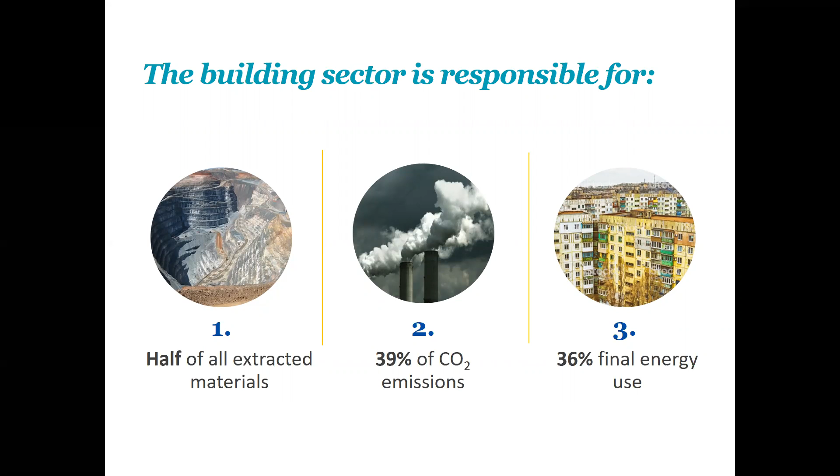The building sector, as I mentioned, is responsible for about half of all materials extracted, as well as about 39% of carbon dioxide emissions and around 36% of final energy use. So the impact from the building sector is immense. This also gives us an opportunity to do something, because if we focus on this sector and try to enhance its sustainability, this could have a very, very big overall effect.

We're interested in using wood as a building material because it can contribute to climate change mitigation and other sustainability goals. Wood is a good material in terms of energy efficiency and can help lead to more energy efficient buildings. It also has some good health benefits, such as helping to reduce the fluctuations in relative humidity inside buildings, which can lead to a more favorable and healthy internal climate for people.

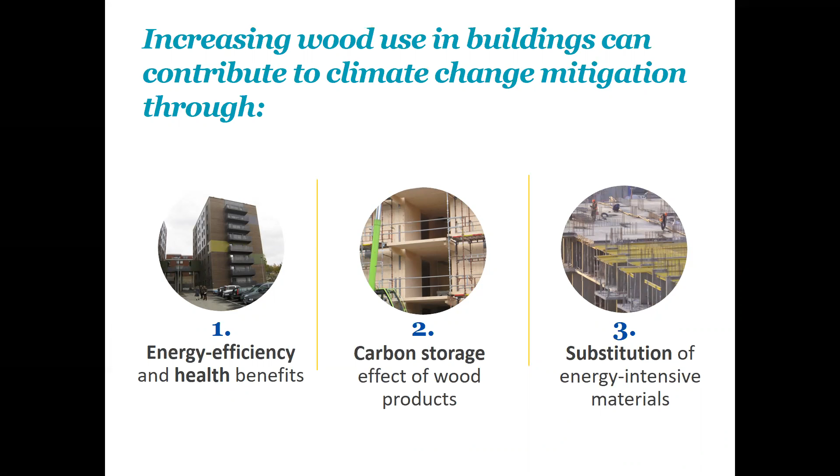About 50% of wood is composed of carbon. So for every ton of wood utilized, around 1 2/3 of a ton of carbon dioxide is stored within that wood material. In addition to the carbon storage capacity, when we're using wood, we are not using other materials which are often more energy intensive, materials such as concrete and steel. So we get an additional substitution improvement in terms of climate change mitigation potential by substituting for energy intensive materials.

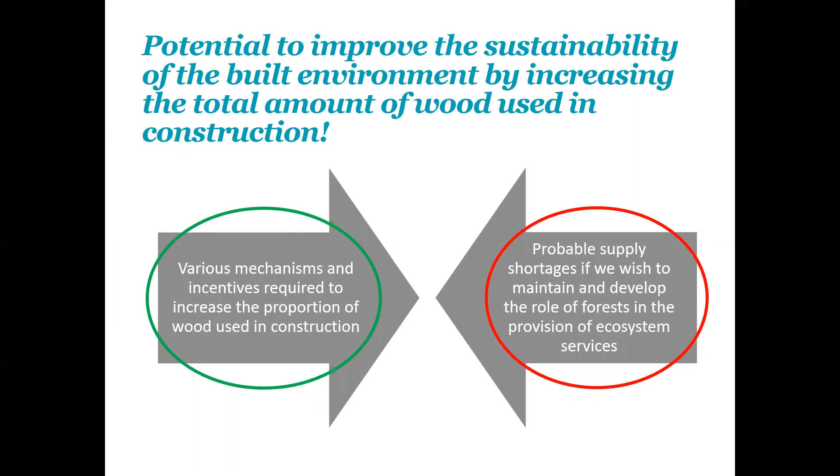There's good potential to improve the sustainability of the built environment by increasing the total amounts of wood used in construction. And on the one side, we certainly need various mechanisms and incentives to increase the proportion of wood being used in construction. However, as we move forward, we may well be faced with supply shortages if we wish to maintain and develop the role of forests in the provision of ecosystem services, as well as providing wood materials for the growing bioeconomy. So we may have a situation where we need to improve the resource efficiency of use of wood. And this forms the background to this particular work package.

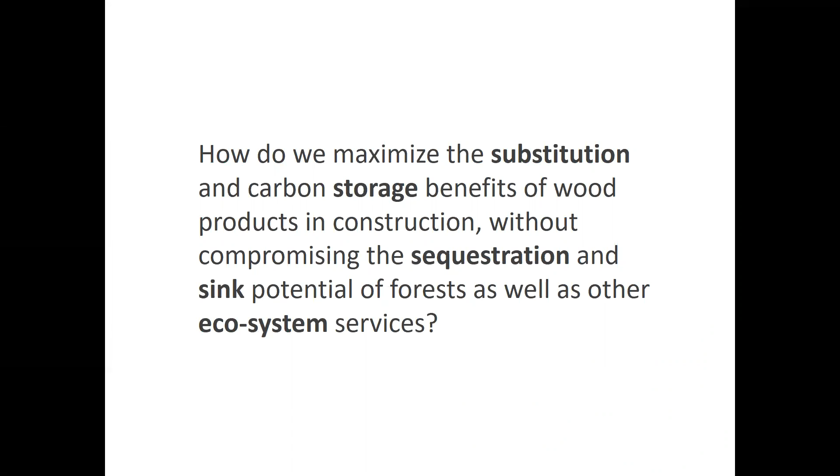So the overriding question is, how do we maximize the substitution and carbon storage benefits of wood products in construction without compromising the sequestration and sink potential of forests, as well as other ecosystem services?

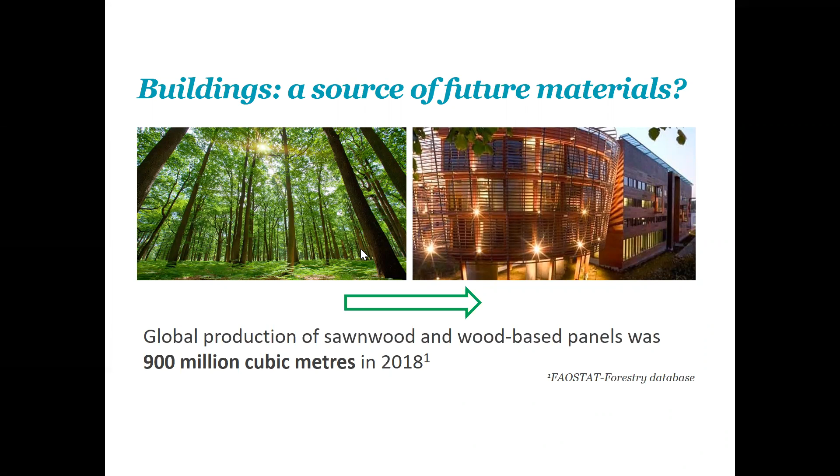Something of the order of 900 million cubic meters of sawnwood and wood-based panels were produced in 2018. And whilst not all of these, of course, go into construction, a large proportion do. So in effect, the carbon storage potential of the forest is transferred to the built environment, to buildings. And as buildings are constructed, the store of carbon in the buildings can increase, and this can be a source of future materials. The wood within the buildings can be a source of future materials if we learn to use this material more effectively.

How much of this wood is available? Well, there have been some recent studies. For example, it's been estimated that approximately 32 million cubic meters of wood is bound up in residential buildings in Austria. And this is forecast to rise to over 50 million cubic meters by the year 2100. This study was part of an earlier Wood Wisdom Net project called Carewood.

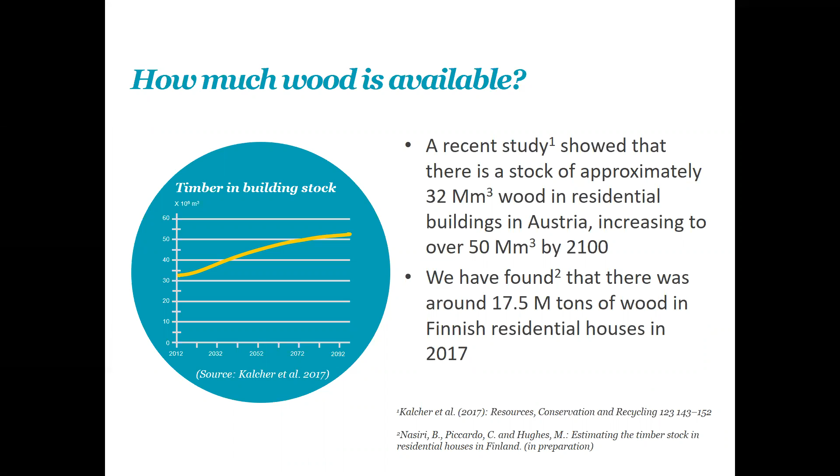In recent work we've been conducting, we've estimated that there's around 17.5 million tons of wood in Finnish residential houses, at least there was in 2017. So we clearly know how much wood is available, and we can use various statistical approaches to calculate the amount of wood.

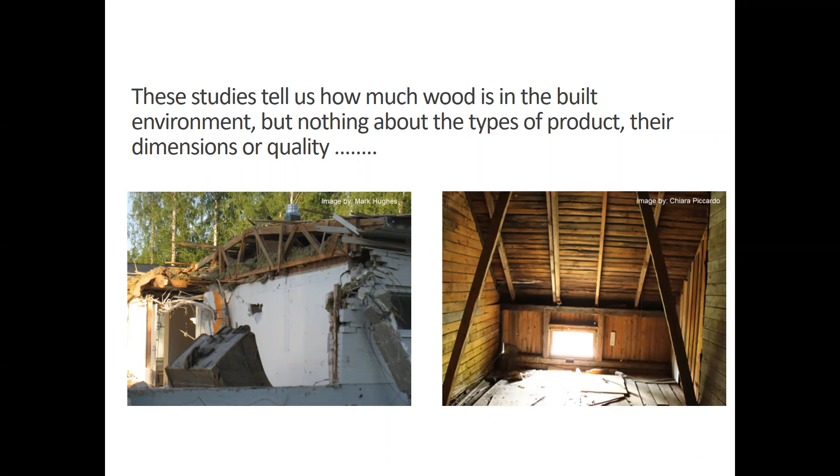So these studies tell us how much wood is in the built environment, but do not really tell us about the type of wood products or their dimensions or their quality. And as you can see in the two images below, on the left-hand side, it's a traditional bricks and mortar construction, but there is wood in the roof structure that could be recovered and reutilized. On the right-hand side, an image of a wooden building where, of course, there's much more wood available. But again, we don't know the dimensions of the wood that's been used, nor the quality of the wood that is in there. And this is something we really need to understand better in order to reuse it in the future.

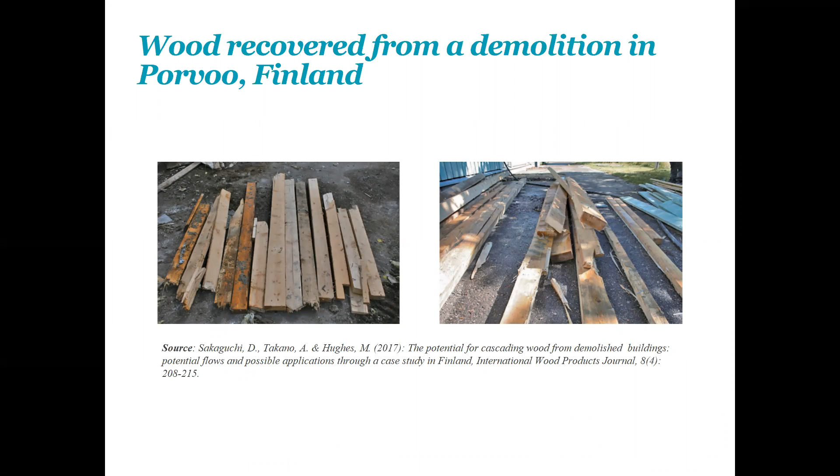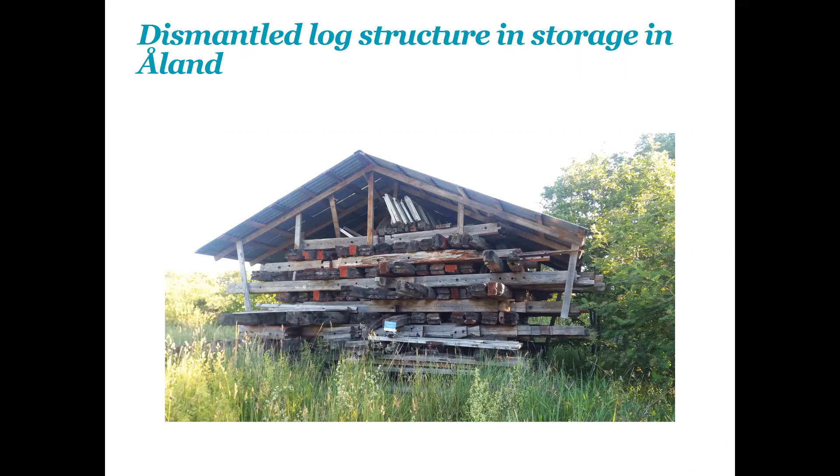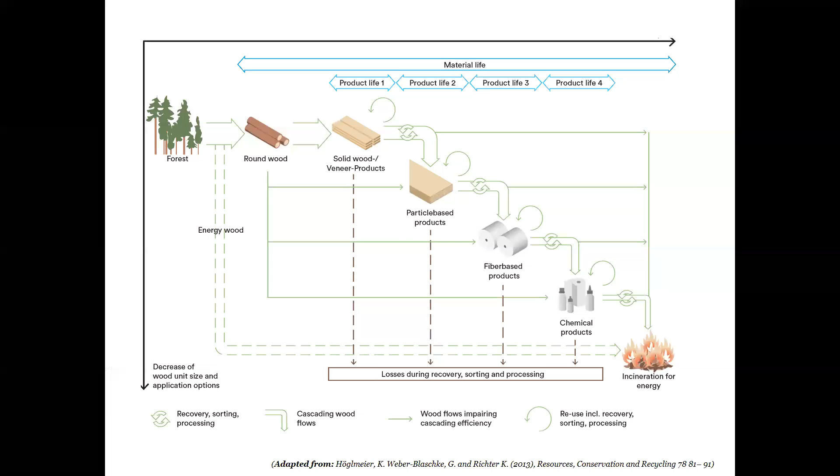For this reason, most of the wood that comes from deconstruction or demolition currently goes straight to energy recovery. So the wood is chipped and it's burned. What we would like to see, and this is the main aim of our project in Future Wood, is to retain the value or the quality of wood for a much longer period of time by reusing it or recycling it in a high value scenario before eventually recovering the energy content, perhaps with further intermediate steps in the cascade chain.

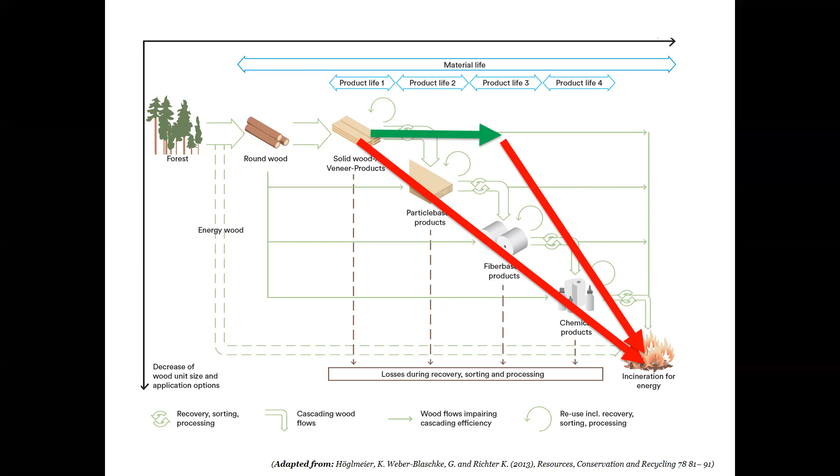However, current demolition practices are not really compatible with material recovery for cascading. So this really limits the cascading options. As we've just seen, wood that comes from buildings demolished in the current way tends to be chipped and used for energy production. So we really should think about building buildings with the ultimate disassembly in mind. So we should have buildings designed for disassembly and the recovery of elements and materials at the back of our mind always.

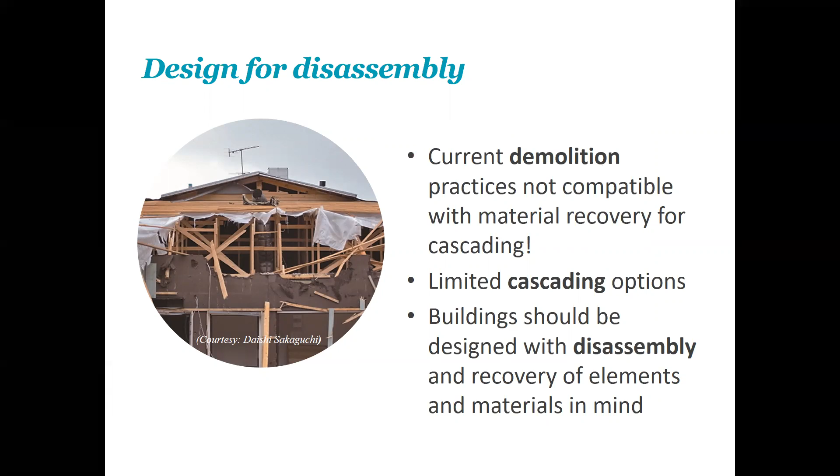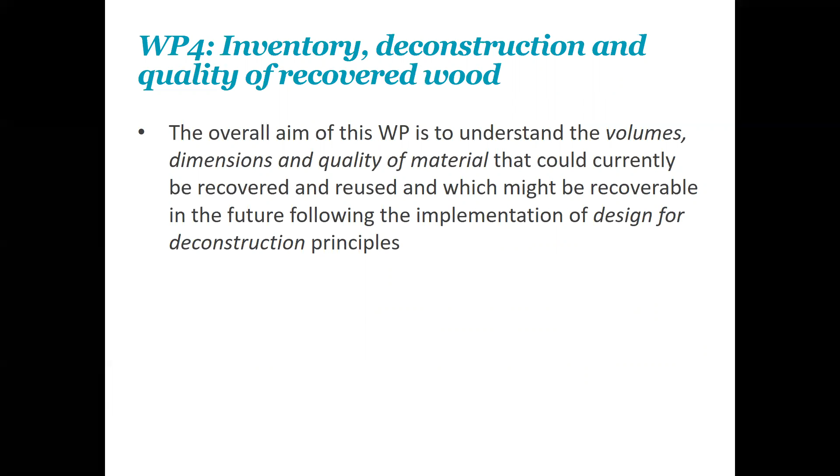So the aim of this particular work package is really to look at the stock of material that's currently within the existing building stock, and to understand how this relates to the wood that would actually come out of buildings. So the overall aim is to understand the volumes, dimensions, and the quality of material that could be recovered and reused, and which might be recoverable in the future if we were to implement design for deconstruction principles.

So we have a number of research questions in our work package. Firstly, we would like to know what the total volume of wood is in the built environment and what it's composed of: the types of products, their dimensions and their function. And how does this vary from one type of building to another? So that's one of our research questions.

We also would like to know how buildings are currently demolished, and are there any actions that can be taken to increase the recovery of high quality timber suitable for reuse or other high value applications. So it may be that there are small changes that could be made that would help us recover a far greater proportion of high value material.

We also want to be able to measure the quality of recovered wood, and what criteria do we need to apply to this assessment, both within the research work we're doing, but also then in practice when we are trying to measure the quality of wood that comes from demolished or deconstructed buildings.

And finally, we need some kind of predictive model to estimate how much timber and in what form, so particularly its dimensions and its quality, is currently available and what will become available in the future, and how this might be affected if we were to adopt design for disassembly processes.

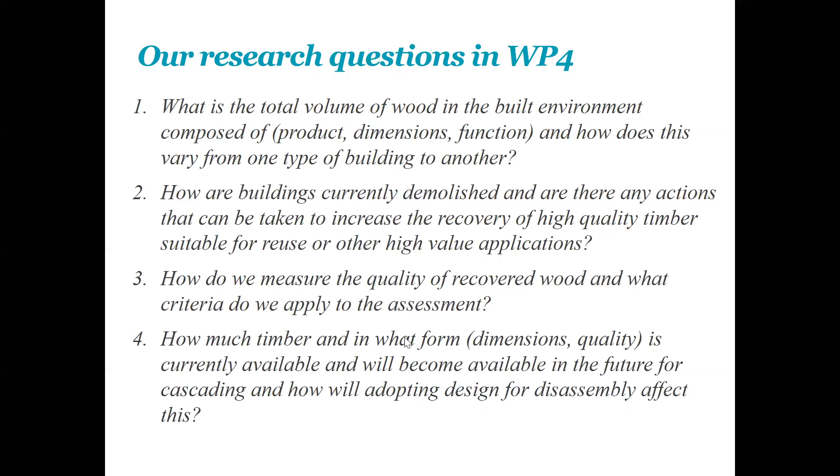So these research questions translate into our 4 tasks within this work package, which are firstly to create an inventory of wood used in construction, and this is not just at the level of volumes, but also incorporating dimensions and product types. So we need to know all about what's actually in buildings. Current demolition practices, so we are exploring the current demolition practices and how these might be modified to recover more material.

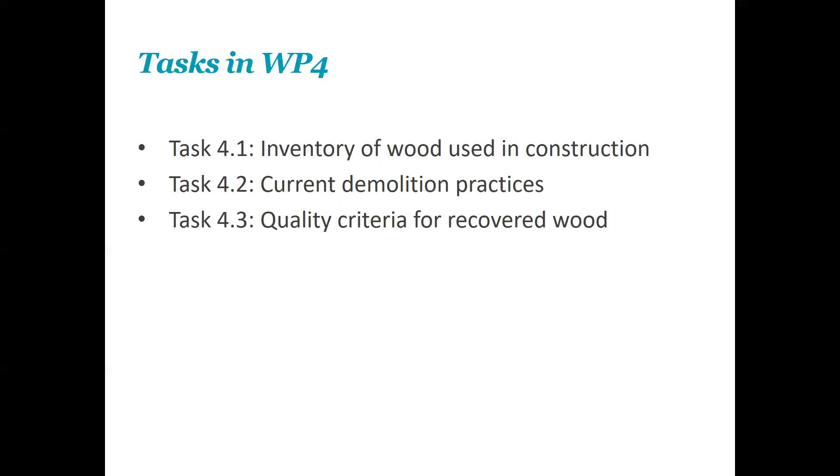In the 3rd task, we are creating a set of quality criteria for recovered wood so that we can measure the quality against certain set criteria that are relevant to the reuse and the recycling of the material. And finally, we want to create a model that enables us to predict the volumes and the quality of recoverable wood in the future.

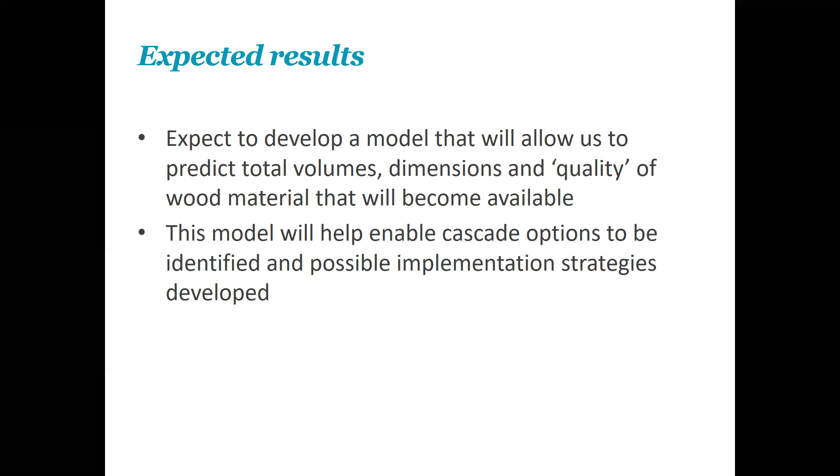The expected results are to develop a model that will allow us to predict the total volumes, dimension and quality of material that becomes available. And this will help us to enable cascade options to be identified and possible implementation strategies actually developed.